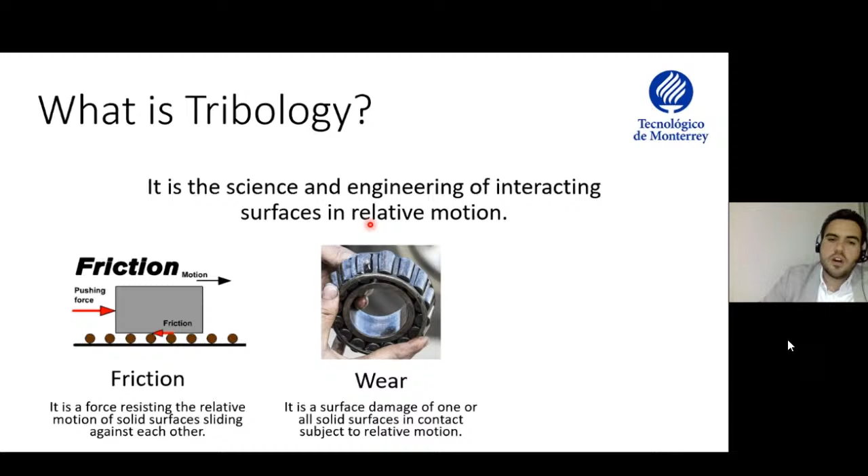The most important thing to know about tribology is that any pair of materials producing friction or exhibiting wear, and having a lubrication or requiring a lubricant to diminish both friction and wear, can be considered as a tribology topic for understanding.

Considering this concept about tribology, we can define what is a tribological component. This is very important because usually we know mostly mechanical components, but we cannot classify them according to their special function. So tribological components have the special function to operate producing friction or exhibiting wear over the long term of operation. So how can I define a tribological component?

This is the definition for a tribological component: it can be any mechanical element, lubricated or unlubricated, acting in relative motion in a mechanism or in a machine, producing friction and wear through its operation.

Maybe these kinds of mechanical elements are very useful, very common in machines, but most of them have to be improved and have to have certain characteristics to exhibit high performance, especially for electric vehicles. So most of these kinds of components are involved in the new infrastructure of electric vehicles.

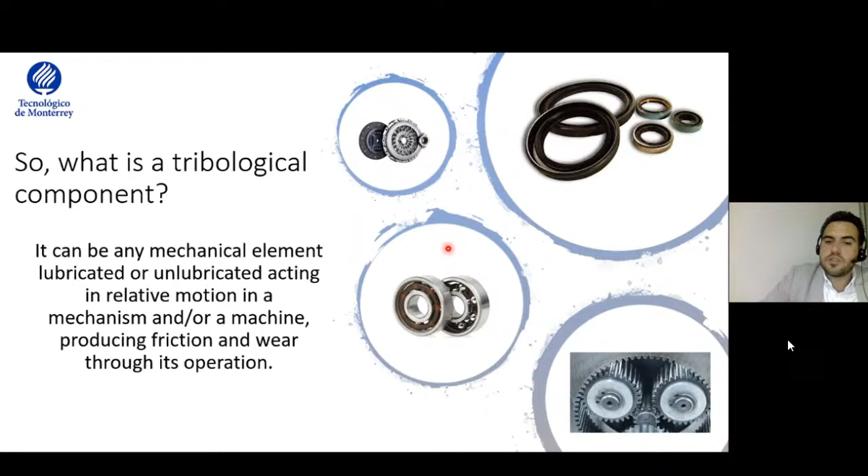To start the comparison, or the introduction for this kind of technology, I would like to start with the current technology in internal combustion engine vehicles. For example, in this picture that I am showing you, we have hundreds of mechanical components interacting together to produce the different tasks and functions inside the vehicle.

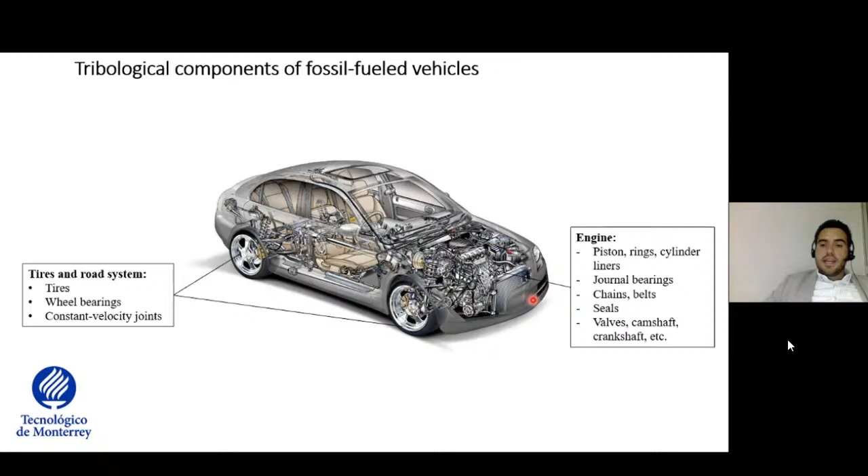For example, we have special components which are tribological components, and they are divided into the following: the tires and road system, which is the most important — if we don't have tires, we never move the vehicle on the roads. So this is the most important tribological component. The other is, there are different mechanical elements comprised in the engine.

Another category is the tribological elements comprised in the transmission and the brakes. Some elements in the suspension system, some elements in the steering, as well as in the differential system. Some miscellaneous, for example belts, pumps, oil, water and fuel pumps, the alternator, the compressor, etc.

And we will have another kind of tribological components named accessories, which involves the wiper blades, the seat belts, air conditioning system, etc.

So the most important thing here is to realize how many components are involved in internal combustion engine vehicles. So all of them produce a certain amount of friction, which produces the energy consumption of the vehicle.

So the challenge for tribologists or for mechanical engineers is to reduce as much as possible the friction caused by the operation of most of these components, with the exception of some components required to exhibit high friction levels.

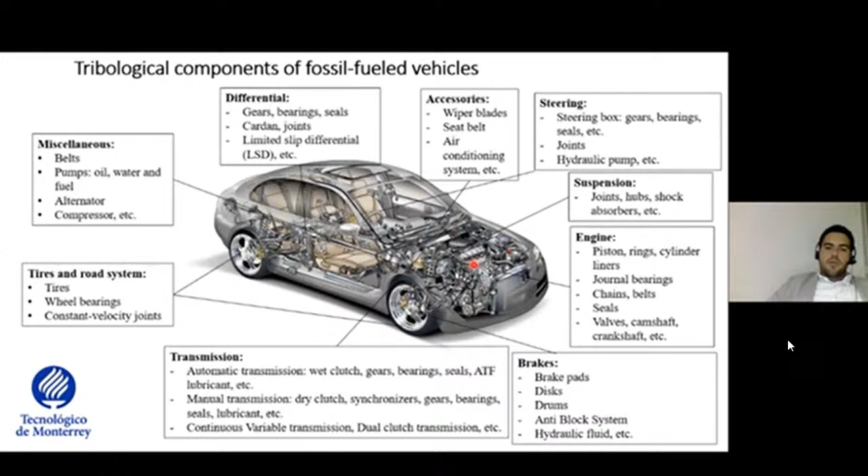So another component that will require high friction levels are the brakes, for example. If we have low friction in brakes, maybe we cannot stop the car quickly, or maybe there will be vibrations or noises due to the lack of control of friction.

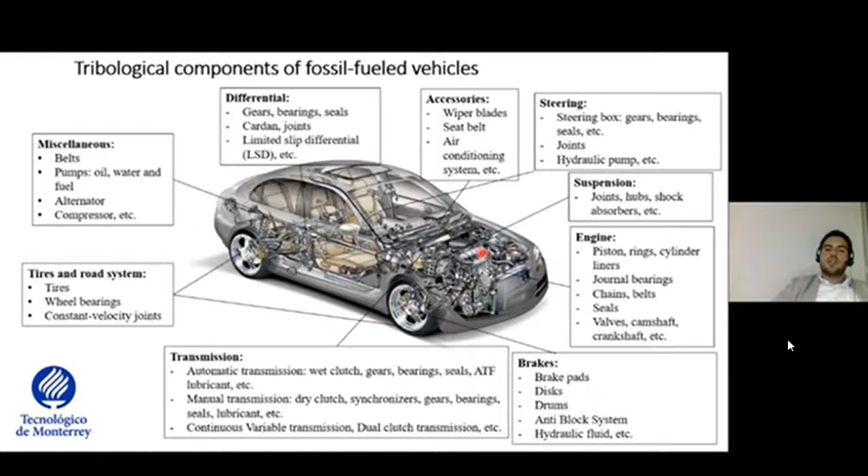So there are many components producing friction energy consumption by friction losses in internal combustion engines, and these losses can be distributed in the following way. For example, if we consider 100% of fuel energy supply to a vehicle, we will have different energy losses.

For example, the most common or known losses in an internal combustion engine are the losses caused by exhaust gases or emissions in the engine. Another is the cooling of the engine, and only 38% of the total energy supply to an internal combustion engine vehicle will be dissipated or used to provide mechanical power to the vehicle. So these are the most important losses, but they are related to heat losses.

So in order to find the friction losses, we need to study more about the mechanical power. For example, in this case, we have two types of losses in the mechanical power.

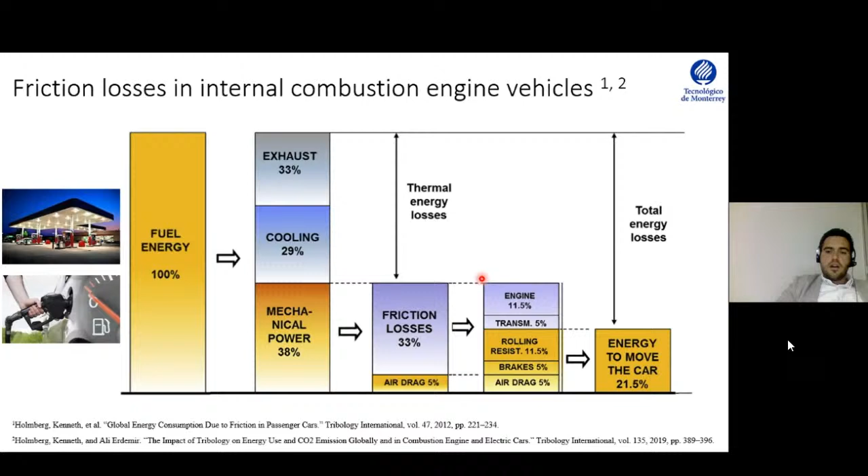This is the labor of tribologists. So in the case of electric vehicles, we will have a different distribution of energy losses. For example, the first thing to consider is the energy supply. In the case of internal combustion engine vehicles, we will use fossil fuels or maybe some biofuels, right?

But in the case of electric vehicles, the main source of energy will be the electricity produced by a grid. This electricity is produced from different sources, ecological sources, or maybe from thermoelectric plants. It depends on the infrastructure of each country.

So when we supply the energy to an electric vehicle which is powered by a battery, this distribution of energy is based on a battery electric vehicle. So the total energy supplied to a battery will be spent in different ways. The first one is that we will have some losses in the charging and discharging of the electricity from the grid to the battery and vice versa.

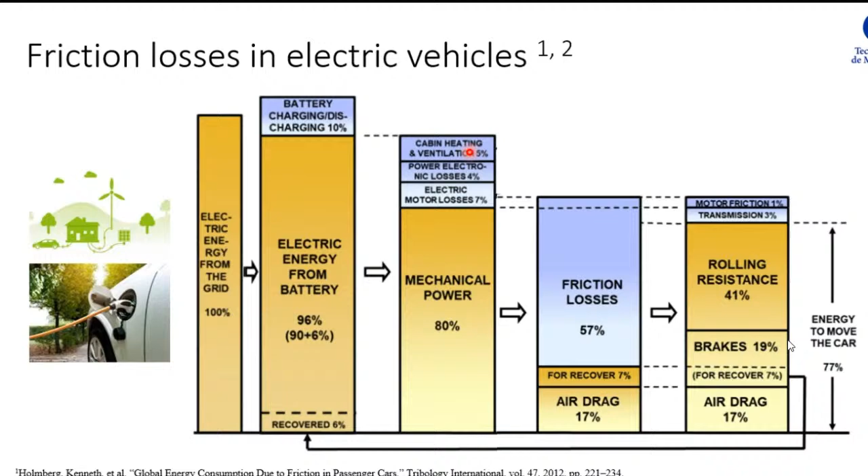So what are the main components, or what is the technology producing the friction losses? There are many components that we will see in another slide, but before this slide, I would like to ask this question: why consider tribology as a key route for automotive improvement, especially for electric vehicles? Well, tribology offers a reduction of fuel and energy consumption in general. Even the smallest reduction in friction could represent a significant energy saving in an electric vehicle.

So considering that electric vehicles tend to be autonomous in a near or short-term future, the autonomy of the vehicle will be led by the durability of the battery in terms of energy, right? So if we can reduce the consumption of energy by reducing the friction generated, we can improve the duration of the battery to get more distance run by the vehicles.

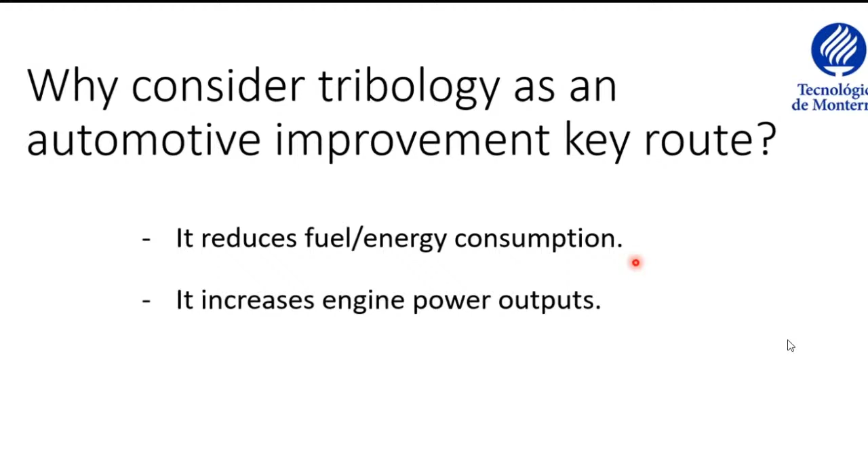So this is the most important thing. Another is that if we reduce the friction, we can increase the engine power output, so we can take more advantage of the electric motor, or the power of the vehicle. Another is the improvement of durability of all the components exhibiting wear in its operation, and the reduction of vehicle maintenance in general, right?

And finally, in electric vehicles, it is very important to consider that we need to reduce extremely the vibrations and noises, because we won't have any more internal combustion engines causing high levels of vibration and high levels of noise by the exhaust. In electric vehicles, there are no noises when they are operating.

The only noises occurring in electric vehicles are the noises produced by the electric current through the entire vehicle, and all the noises produced by some malfunctions of other components. So the reduction of friction or the control of friction could help us to maintain low levels of noises and vibrations in our electric vehicles.

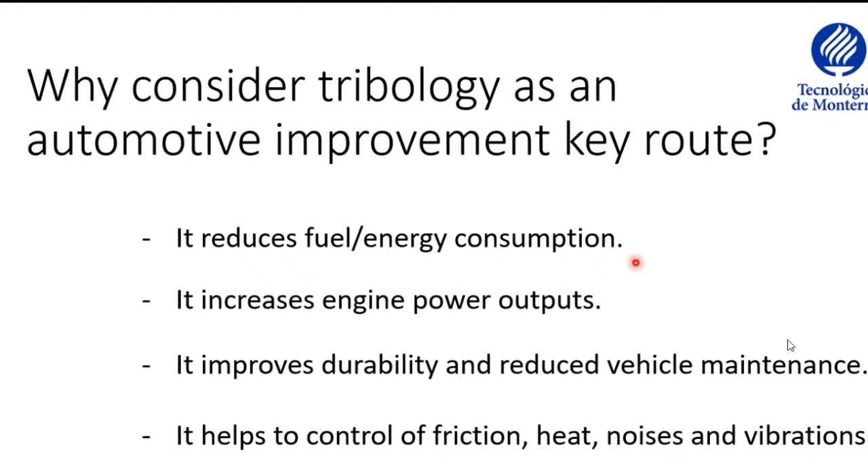So in the case of the technology, producing these kind of critical friction levels can be divided in different parts or different categories. The first one is the main source of power to the vehicle, that is the electric motor. Another is the transmission.

Usually, it is very common finding powertrains of electric vehicles comprising an electric motor attached to a transmission. It is because the transmission system or the gearbox helps to reduce the speed of the electric motor, but it improves the torque required in the electric vehicle. So it is the most often architecture found in electric vehicles.

Another thing producing friction are the wheel bearings. These are unavoidable elements in any vehicle as well, so the friction produced there is very critical in the vehicle. Another is all the mechanical components involved in the steering system, the tires, obviously, and the ball joints, and the constant velocity joints. These joints are also unavoidable because they allow us to use the suspension system. Mechanically, they are also very important components, but they produce high levels of friction.

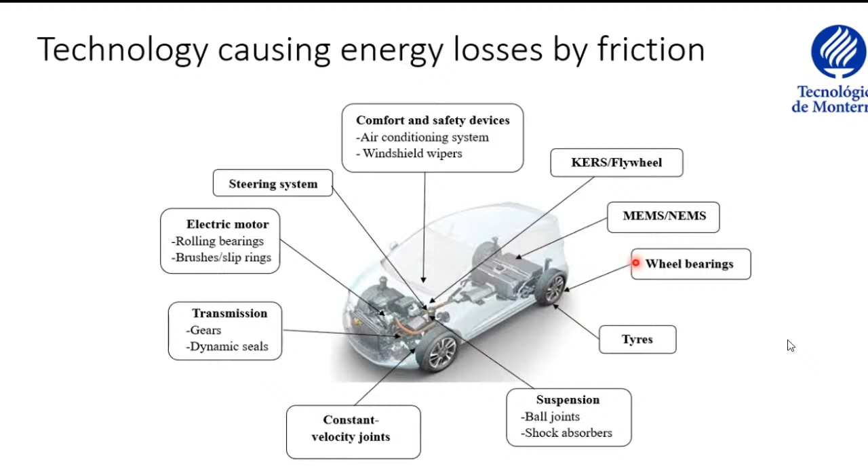And finally, we will have many, I don't remember the number, but around 20 or 50 MEMS or NEMS used for sensing the different operation of the vehicle. So these are the most critical technologies, and I will talk about each of these categories. Starting with the electric motor, we have different electric motors which can be considered for electric vehicles. The most important is the synchronous permanent magnet motor.

Actually, it is the most used in sport cars or in passenger cars, and the other four are also an option, but they are not as popular as the synchronous permanent magnet motor. They are rated according to their electric efficiency, and as you can see, the most efficient is the brushless, right? The synchronous brushless motor.

So, what is the constant mechanical element or tribological element producing friction losses in all these types of electric motors? The main is the rolling bearings, or bearings. This is the most common element producing friction losses, and in the case of brushed motors, we will have this element that is one of the causes that this motor is not suitable for electric vehicles.

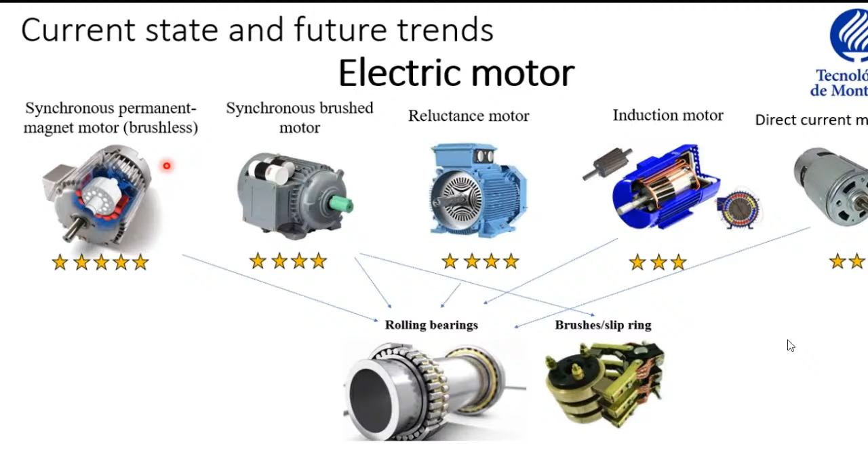It is because the brushes and slip ring contact produces high levels of friction and electro friction due to the sliding contact produced in this component. So the efficiency of this motor is lower than this one, because this one doesn't use a brush and slip ring contact.

Okay, so what is the trend to reduce the friction produced in these elements, in particular the rolling bearings? Well, we need to conduct research on grease technology, different coatings for the balls or the rollers in the bearings, and new designs in rolling bearings. If we can improve some of these points, or even the three points, we can reduce in significant amounts the friction produced in these kinds of motors, right?

In the case of brushes and slip ring, there are some works attempting to reduce the friction produced by the electro-tribo contact, and there are some pairs of materials meeting this purpose: graphite and graphite, coin silver, brass fiber.

But there is a very huge challenge in tribology for this component. That is getting a better understanding of the electric tribo contact produced in this brushes slip ring contact, right?

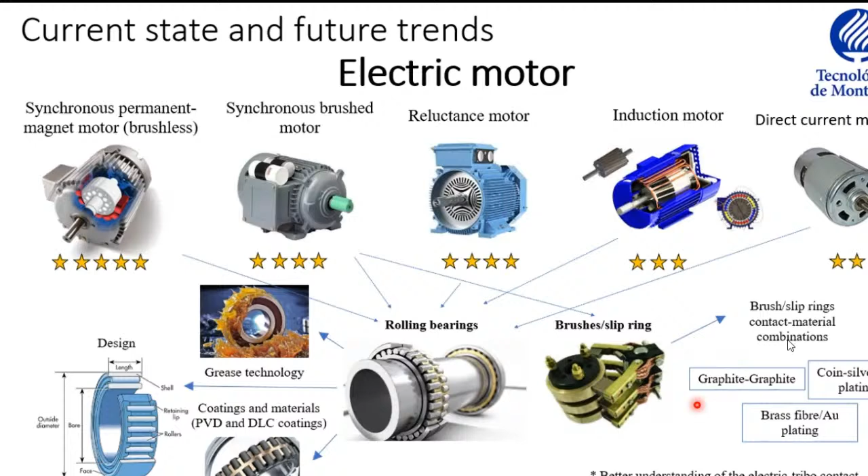So in the case of grease technology, we will need to understand what is the composition of a common grease. A common bearing grease is made mainly of 70 to 95% of a base oil, which is commonly made by using mineral or synthetic oils. 3 to 30% of the grease is made by a thickener. This thickener can be made of simple metal soaps or complex metal soaps, or maybe some non-soap thickeners, and the rest is made of additives, different kinds of additives.

Each additive gives certain physicochemical properties to the grease. It is very important. We can use these 2 points as a constant, but the addition of additives will define the specific properties that the grease will have. So we have an evolution of the production of greases for electric motors or for rolling bearings.

The first greases used by humanity are the animal fats. This is well known to everyone. The animal fats were used by Egyptians and Romans. This is the first report of using a grease for helping to transport heavy loads. And then with time, different compositions of different greases have been produced.

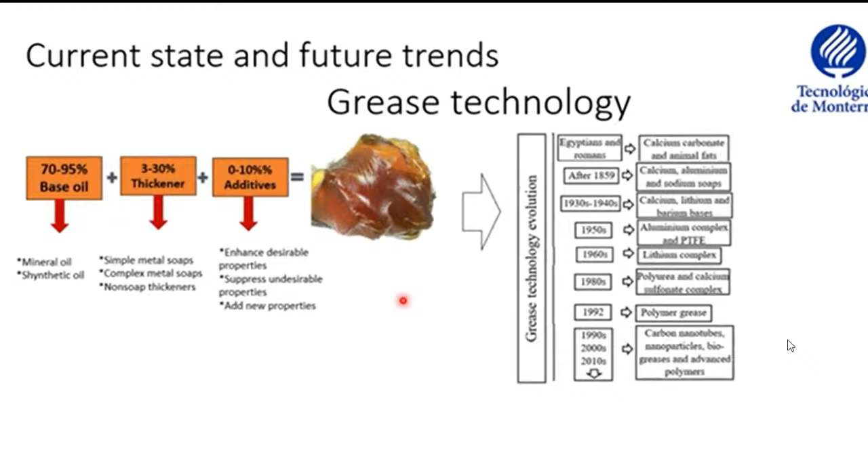Currently, the research on this lubricant is based on the use of carbon nanotubes, some kinds of nanoparticles, discarding the use of mineral oils or fossil oils by using bio oils or bio greases, and using some high performance thickeners through the implementation of advanced polymers. So this is our trend, and in electric motors we can implement some enhanced or high performance greases being developed these days.

So the current progress is the development of greases made of synthetic oils and vegetable oils to meet the new eco-friendly demands in the world, using thickeners made of rubber, polypropylene, and methylpentene, and using a wide range of new additives produced in the world.

So in the specific case of electric motors, there is a current challenge that is specifically based on the improvement of a property called tackiness. Tackiness is a grease property that allows the sticking and formation of long threads between two separating surfaces, mainly in gears or in the rollers of rolling bearings. while the grease redistributes itself between the surfaces.

So this property can be said to be the most important requirement for greases used in EVs, or electric vehicles. So finally, we cannot discard the use of bio oils or bio greases for producing electric vehicle greases.

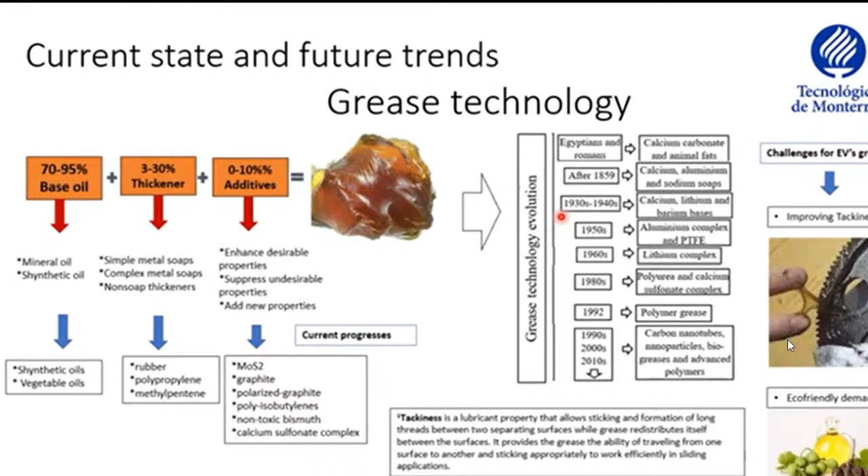Okay, so in the case of transmission, we will find these common configurations and architectures. One of the most popular is the in-wheel motor system, in which electric motors are attached directly to the front wheels, and these wheels are moved independently by each electric motor. This is the most efficient because there is not a gearbox attached to the electric motors, but this system has some deficiencies.

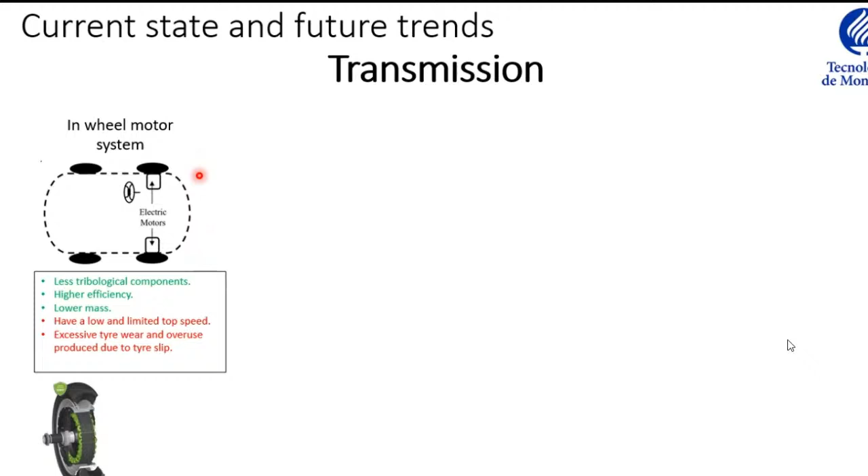For example, they have a low and limited top speed because the electric motor is directly connected to the wheels, and excessive tire wear produced due to tire slip. As you can see, the electric motors are attached to the front wheels, but when the electric vehicle takes a curve or turns left or right, each electric motor must control the speed independently for each wheel. So in this process, the tire produces a slippage with the road, so the wear caused to the tire is very high. This is the most important deficiency.

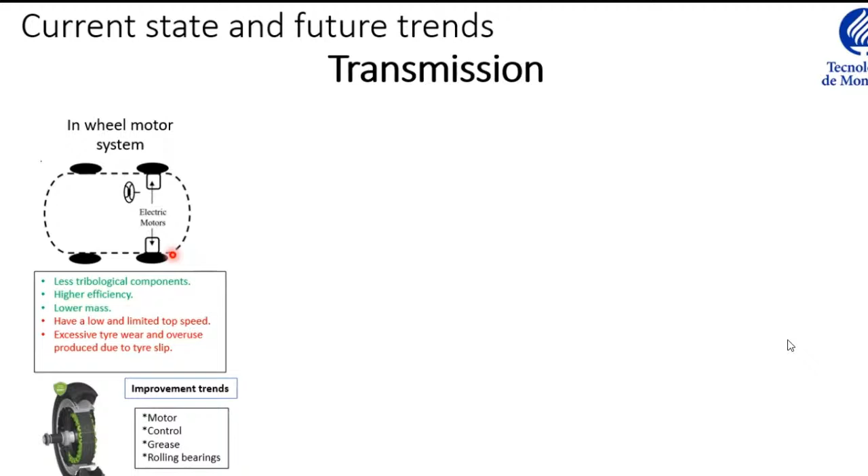What are the improvement trends? The first one is using efficient electric motors in this configuration. Improve the control of the electric motors in this kind of configuration. Producing an efficient grease and using rolling bearings with very low friction. The second kind of architecture is an electric motor attached to a fixed gear, and this fixed gear is attached to a differential in the front wheels.

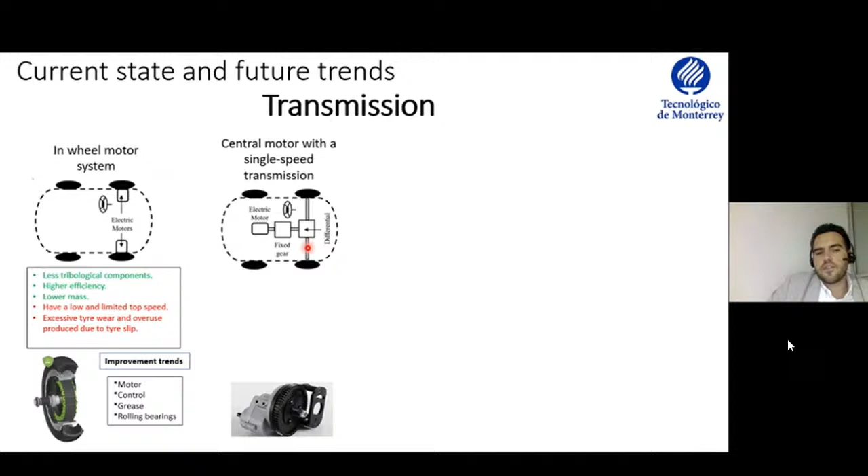It can be also to the rear axle, but in this kind of configuration, it can be used also in the front axle. So what is the problem here? The problem here is that we have a fixed gear or a gearbox that produces high levels of friction. So this is the main problem, because there are more moving parts. But this configuration helps us to increase the vehicle driving range and top speed, having a satisfied dynamic performance and easier speed control, right?

And finally, we have a central motor with a multi-speed transmission. This configuration is not so popular. Actually, it is a current research trend for electric vehicles, using an electric motor attached to a clutch or to a wet clutch, and this clutch is attached to a gearbox. This is because this gearbox can be used according to two different speeds, or we can use a multi-speed transmission, for example, a CVT or an automatic transmission.

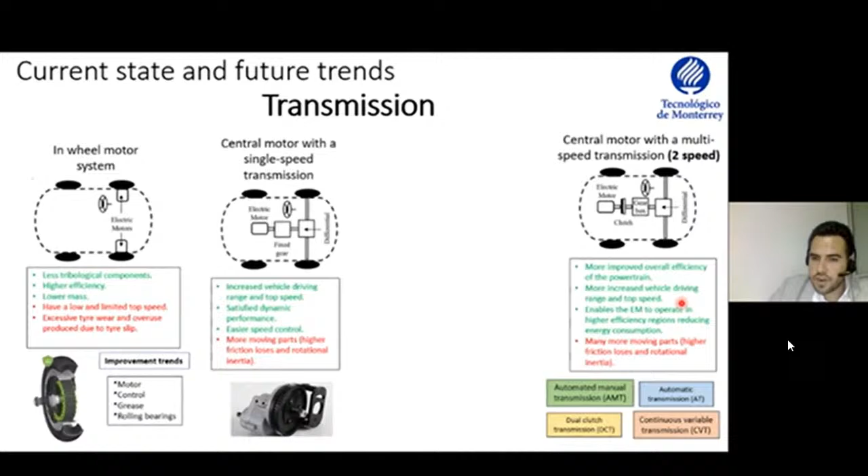I don't know. The point here is that we need to have a gearbox that can be switched for two speeds. And the problem here is that we have many more moving parts because this gearbox will have many more gears and many more synchronizers or another element inside. But it exhibits some significant advantages. For example, more improved overall efficiency for the powertrain, more increased vehicle driving range and top speed, and it enables the electric motor to operate in higher efficiency regions, reducing energy consumption.

As I mentioned before, this configuration is still in research for different companies. But it can be important to consider for future investigations or future developments. So, what are the improvement trends? In the case of gears, in these two configurations, we can modify the gears inside the gearbox by using low friction coatings or some kind of texturing in the gears. In the case of dynamic seals, because all these elements will have dynamic seals, it is by using low friction materials as well, surface texturing, and improved polymer lubricating oil compatibility.

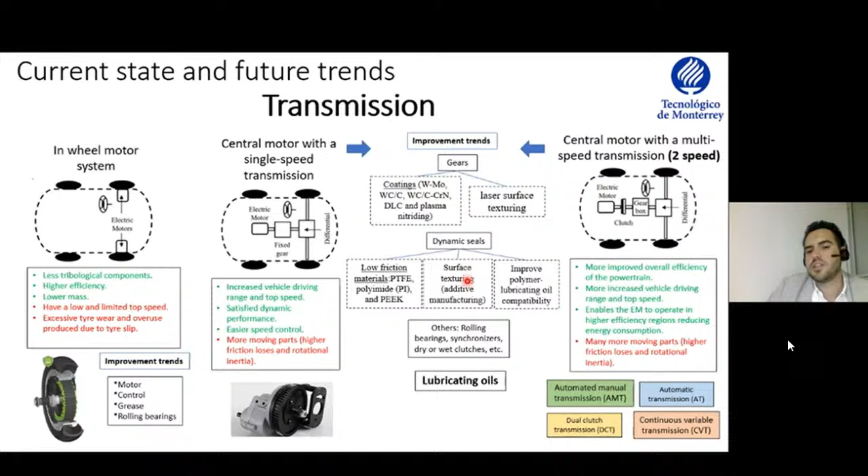This is more like a wear problem, right? Caused by the lubricant incompatibility with the polymers either in the electric motor or in the gearbox. And finally, choosing the appropriate lubricating oil is really a challenge in this technology. Lubricating oils are expected to change in the coming years, especially for electric vehicles propelled by electric motors attached to a certain transmission, right? Because the electric motors are inside the transmission system or the gearbox, and the whole system is lubricated by using the same oil.

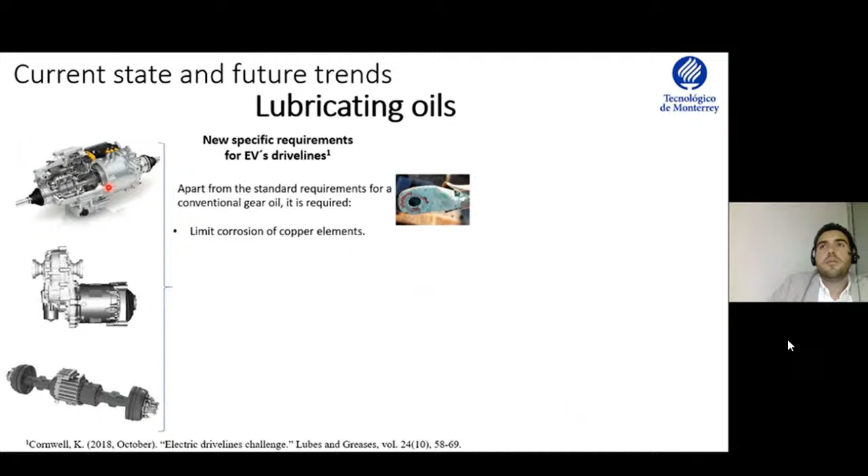So there are some problems. For example, the electrification of the entire shaft can cause some bearing currents, or some gear currents or leakage currents from the electric motor to the shaft, producing premature wear in all the mechanical elements that you can see inside the powertrain. So these lubricating oils must meet new standards or new demands for specifically these kinds of powertrains.

For example, the resistance to corrosion should be improved, especially for copper elements, because we will have the lubrication of the entire wire of the electric motor, and also we will have different alloys and metals in the entire powertrain. So if the lubricating oil is not resistant to corrosion, or does not isolate the corrosion in the system, all the elements there will be corroded and will fail in a very short time. The other thing is to improve the compatibility with polymers, especially with resins used in the wires of the electric motor.

Most lubricating oils existing today, especially for gearboxes, have some acidic components in their composition, so they can damage the polymers. For example, resins or certain O-rings or certain seals used in the powertrain. So if the lubricating oil does not meet this compatibility, any electrical device will fail just by the contact with the oil.

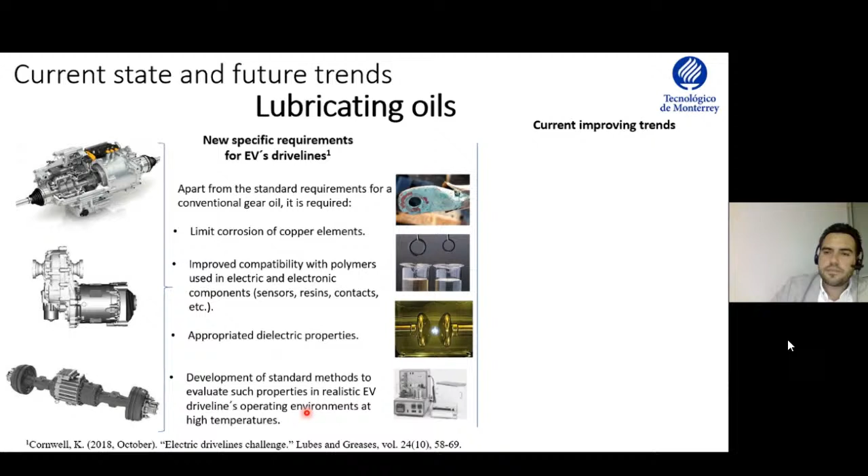And another trend is the use of more improved synthetic based oils. This is the challenge, because these synthetic based oils are very often used in high demanding applications, but they have not been tested for being used in electric powertrains. Another is not to discard the eco-friendly demands. So we can blend or formulate new electric vehicle lubricants by using certain amounts of vegetable oils.

It is well known that vegetable oils exhibit better lubricity than even synthetic oils, but the problem with this kind of oils is the low resistance to oxidation. So the problem with lubricants based on vegetable oils is the durability. But we can improve the durability or the resistance to oxidation by adding certain additives. So the formulation considering both synthetic oils and eco-friendly oils is also a challenge, right?

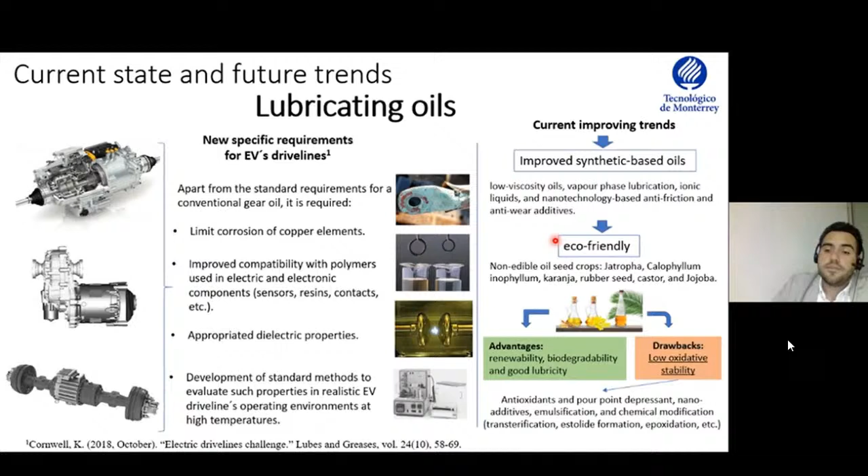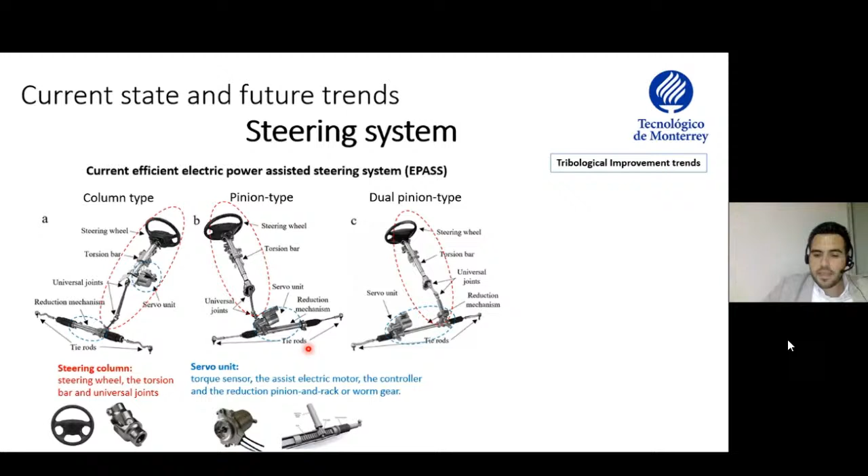So in this case, we have a steering column that has a steering wheel, the torsion bar, and universal joints producing friction losses. We also have the servo unit, which comprises the electric motor, the torque sensor, and the pinion and rack or worm gear that is in charge of producing the movement of the wheels mechanically. And finally, we will have the tie rods, the pieces used to connect the rack and pinion gear with the wheels. Okay, so these three systems are high consumers of energy from the battery.

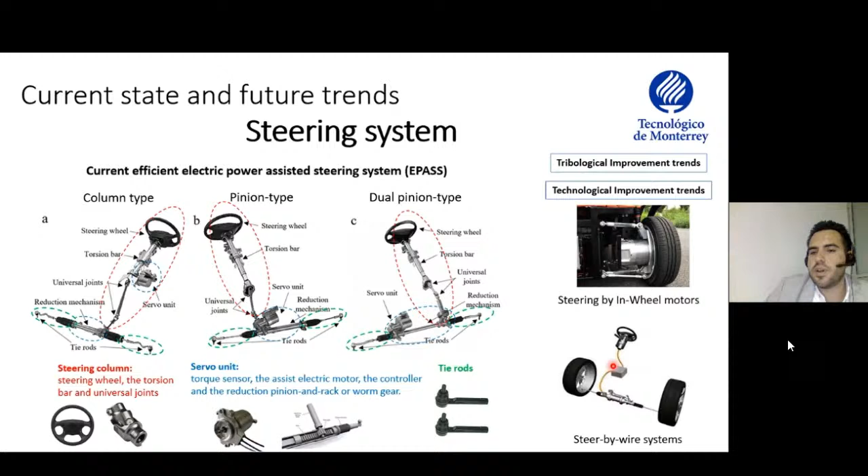So we have some technological improvements to reduce or eliminate these mechanical elements, and the most attractive is again the in-wheel motor system. In this system, we totally discard these components by only using a motor, controlling the speed for turning to the right or turning to the left. And another system is the steer-by-wire system, in which the steering column is eliminated, and we only have the pinion and rack gear actuated by an electric motor, and that's it.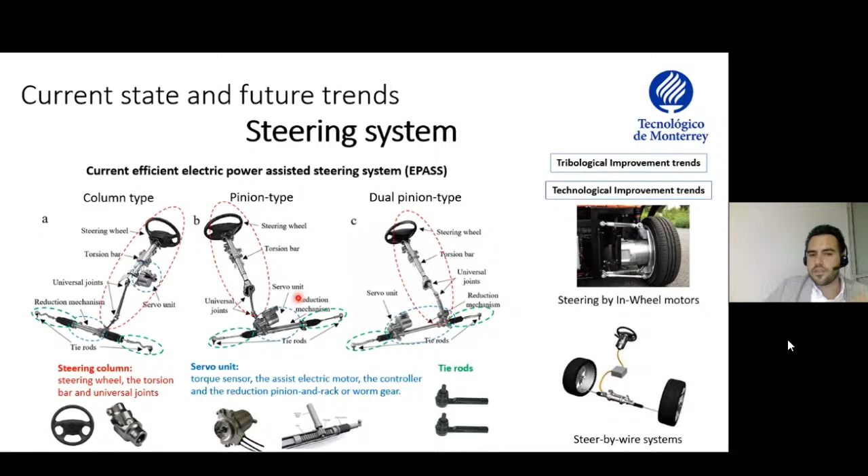Okay, the motion of this pinion and rack to move the wheels is produced by a signal sent by a computer in the wheel. It is not totally safe or totally confident for the user, because we always need to feel the mechanical contact with the wheels just to provide security to the user. If we don't have this contact, it will not be safe for the user. Currently there are some rules which prevent the use of this system because it has not improved as required for exhibiting high levels of security.

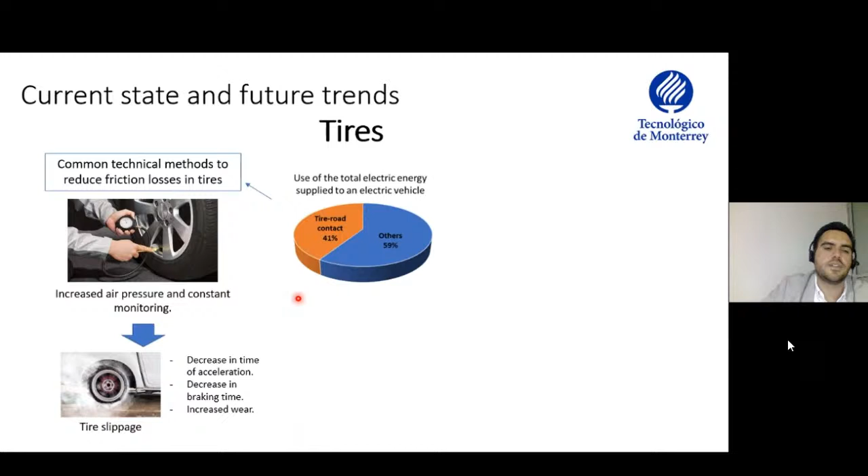And the other component is the tires. We have different ways to reduce the friction in tires. The most common and the cheapest method is increasing the air pressure of the wheels and constantly monitoring this pressure. But usually this technique produces tire slippage. It decreases acceleration time, it decreases braking time, and it produces increased wear of the tire. So we have other options.

The first one is the new tire design. This is in order to reduce the friction consumption by the wheel and to reduce the weight of the wheel, right? Also, if we can reduce the weight of the entire vehicle, we can reduce the consumption. So these new trends in tire design are getting more attention, especially for electric vehicles.

The other one is the use of new materials for the rubber of the tire, but although they have exhibited very significant results in terms of friction and weight, the production of these new materials has certain drawbacks for commercialization. The first one is the high cost. Another is the unreliable production techniques and uncertainty over environment, health, and safety risks, right? Because some materials are dangerous for humans.

And the other one is to control the operating parameters. For example, controlling the air pressure of the tire, the driving speed, and the tire air composition. We can use a different gas inside the tire, different from conventional or environmental air, right?

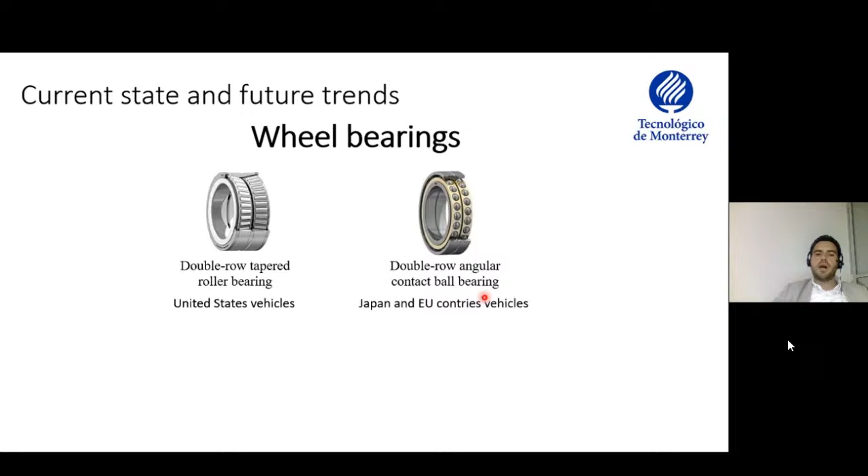For example, in the United States, the vehicles produced there use these wheel bearings, and in Japan and European countries, they use these kind of bearings.

So what are the common components of these bearings causing friction? One is the polymer seal that avoids the leakage or spreading out of the grease. Another is the grease, obviously, and the final is the rolling bearings used in the bearing.

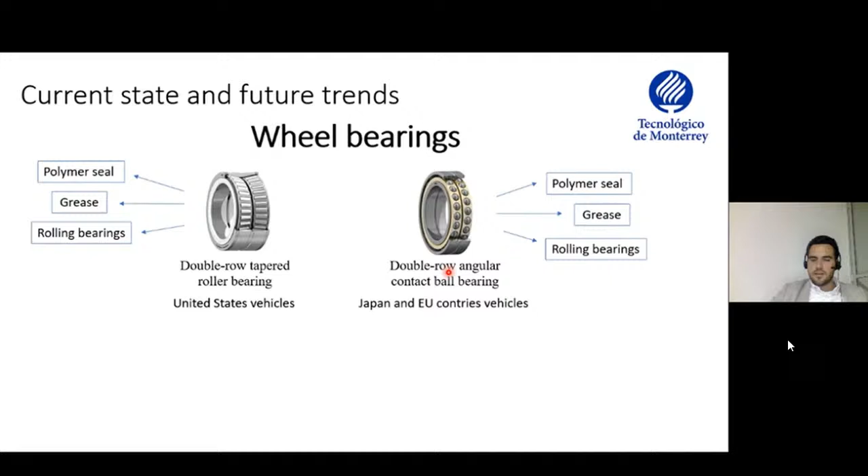So what are the improvement and development trends? One is new designs by reducing weight, improving the maintenance periods, improving the sealing capacity of the seal, and improving the grease. With new design, we can reduce the size of the bearing, and if we reduce the size of the rollers, we can reduce friction and reduce weight.

Also, we can use some interesting coatings which are currently developed. The most important or most remarkable is the DLC coating, that is diamond-like carbon coating. It is the coating exhibiting the lowest friction levels in any kind of application.

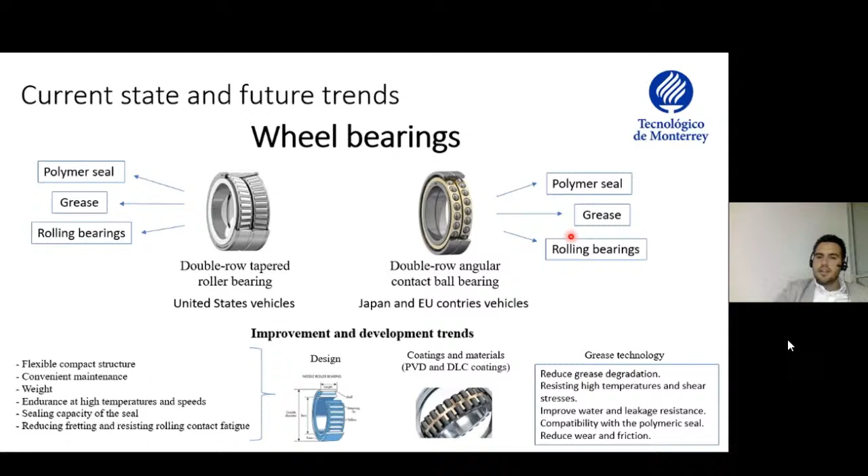So in the case of grease technology, we need to take into consideration the developments presented in the previous slide. And in the case of constant velocity joints, maybe we cannot imagine what a constant velocity joint is, because it is a very important mechanical component. So this is a mechanical constant velocity joint.

This component here is the constant velocity joint, and it operates by using a kind of roller bearing. It uses a grease and it uses a boot. The boot is a seal in order to avoid that the grease spreads out from the bearing.

What is the problem here? The main problem of this component is the rupture or failure of the boot. With time, we will never realize that our boot, or the boot of the constant velocity joint, has failed. So the problem here is that the grease spreads out from the bearing, and with long-term use, the bearing fails, causing a lot of friction losses.

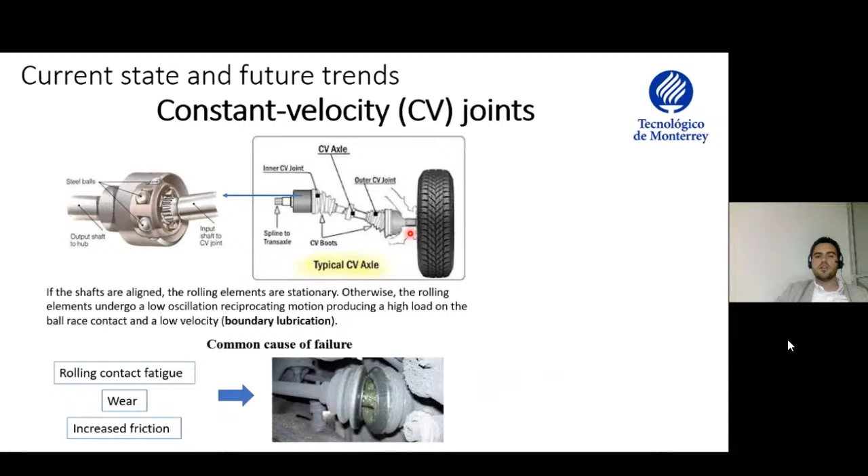So it is a critical component even in internal combustion engines, but this component will also be used in electric vehicles. So we need to take care about the performance of this component. The most important thing to consider for improvement is the grease technology, but also the compatibility with the rolling bearings and the compatibility with the boot. If we improve these 3 points, we can improve the performance of this component.

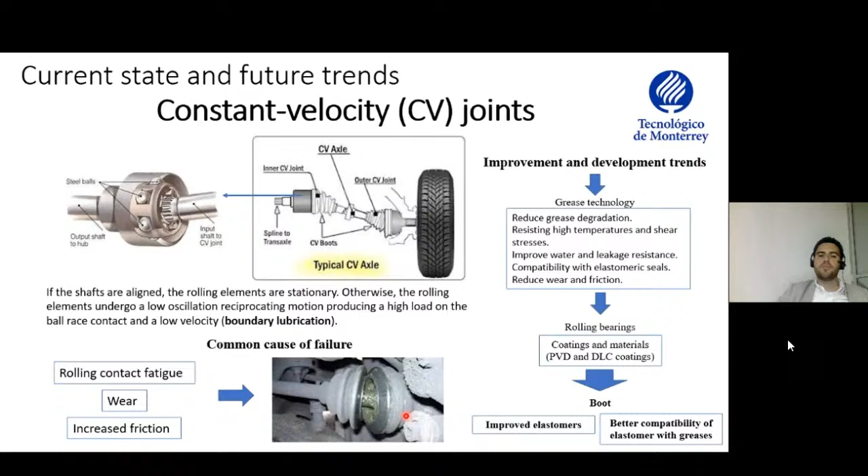Another important technology and current trend in research is the kinetic energy recovery system, especially flywheels. This is a technology used to recover as much as possible the energy dissipated by stopping the car when it is running.

Everyone knows that the electric motor used in electric vehicles can be used also as a generator. So when we use the electric motor as a generator of electricity, we can recover electricity, but not totally efficiently. So we need to use a mechanical technology that helps us recover more energy from the stopping step.

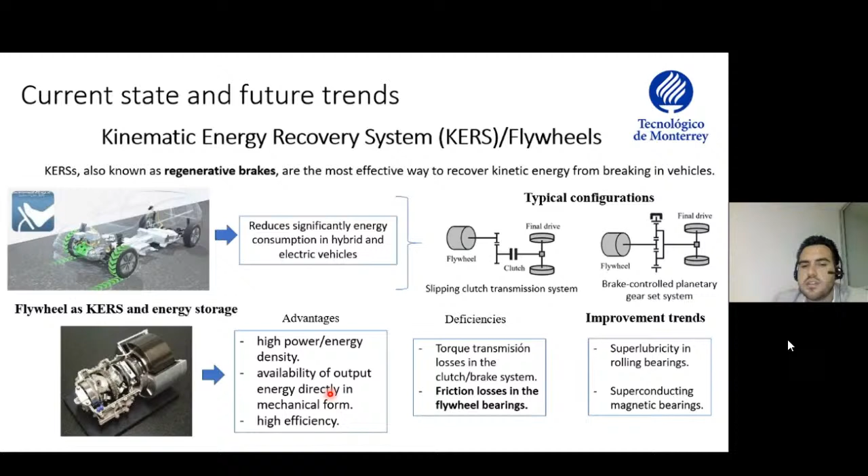But in the future it can be implemented in these kinds of systems for improving electric vehicles. In the case of comfort and safety devices, we have an unavoidable system that provides us comfort, especially in countries with extreme weather: the air conditioning system. This perhaps can be considered an unimportant component producing friction losses. However, it is one of the main sources of energy consumption in an electric vehicle, used for example in winter or in summer when the weather is extreme.

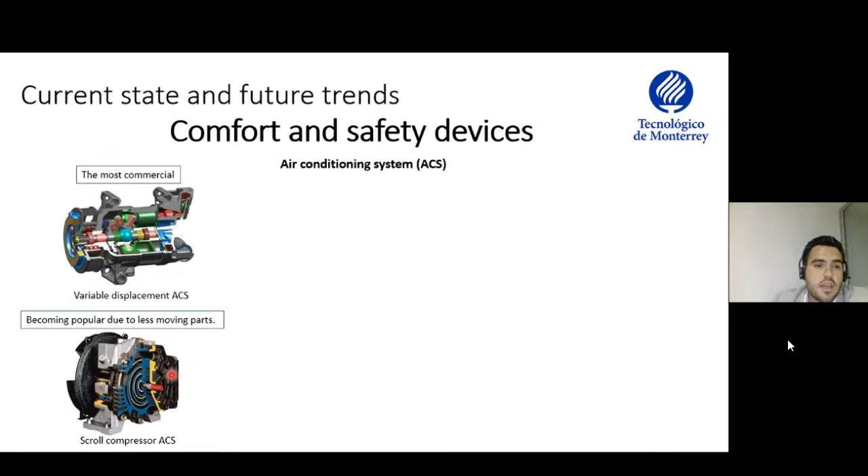So there are different configurations of these mechanical systems, but there are some improvement trends. The most important trends for reducing friction in these components are the use of sliding elements made of different materials causing very low friction, for example polymers, or again DLC, diamond-like carbon.

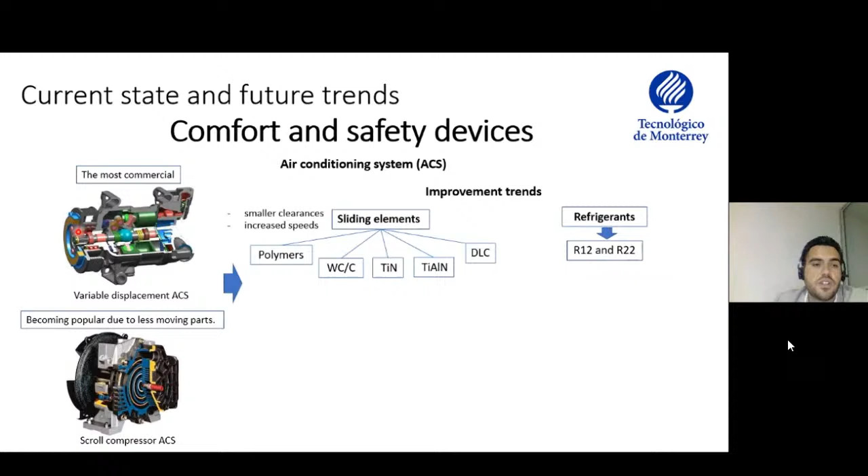Another trend is the use of refrigerants exhibiting low friction coefficients during the air conditioning process, for example the use of CO2 or carbon dioxide. This is for two reasons: first, it exhibits lower friction coefficients in the system, and second, the eco-friendly demands or lowest damage caused to the environment by using this refrigerant. However, it is not a rule - it is not accepted in any country yet to be used as a refrigerant, but the trend is to investigate more about this.

In the case of lubricants, the main ones used are synthetic polyolester and polyalkylene glycol. These lubricants are used together with the refrigerants inside the air conditioning system, and both fluids lubricate together. As a note, if we reduce the friction in this component, we can reduce energy consumption in the battery of electric vehicles. So it can be a very critical mechanical element considered for the improvement of electric vehicles.

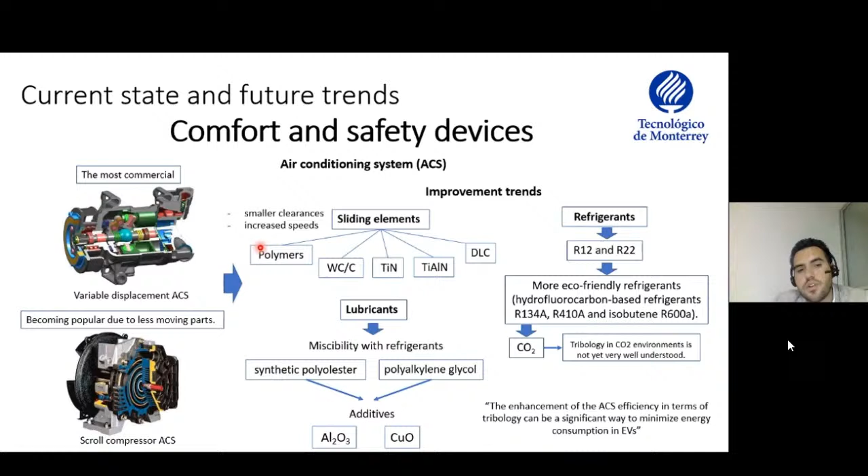So in the case of suspension, I will focus on shock absorbers. This is because in electric vehicles it will become a real problem, particularly in terms of comfort of the vehicle. We have different kinds of shock absorbers - they can be active, passive, or semi-active, and they can have architectures like twin tube or monotube, the most common in vehicles.

What is the purpose of this shock absorber? This stud can be moved up or down when the vehicle moves, or when the tires are rolling, and there is an oil seal. All these parts are lubricated using an oil, but when this stud moves this way, friction is produced in this part. This seal avoids leakage of the lubricant contained in this part to the exterior - it is a dynamic seal that promotes the movement of this bar but avoids the leakage of the fluid.

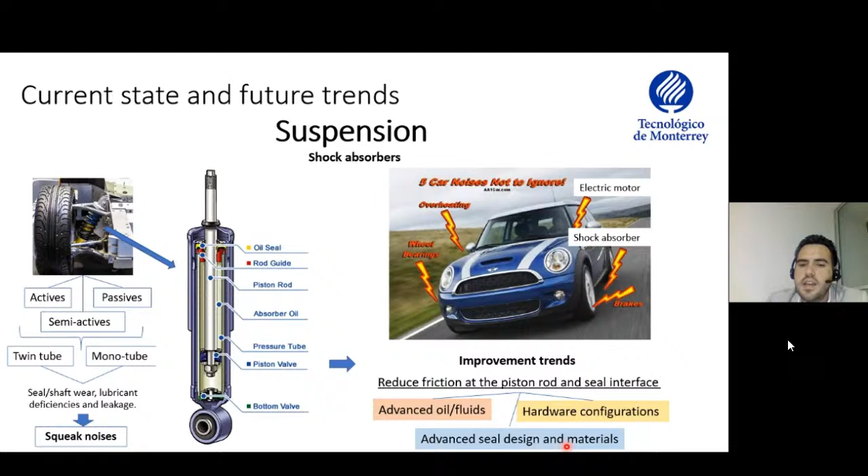So we can use novel or advanced oil fluids. We need to use or develop new hardware configurations for these kinds of components, and advanced seal design and materials. Finally, electric vehicles have different microelectromechanical systems, also named MEMS, or NEMS in the case of Nano.

These systems are involved in the sensors in electric vehicles. For example, we have inertial MEMS. There are some examples of sensors based on inertial MEMS: pressure flow MEMS, infrared optic MEMS, and radio frequency MEMS. So in this case, we have a hybrid vehicle.

But most of these MEMS are used in electric vehicles. Now, if we consider the use of other technology to make our electric vehicles autonomous, we will use more and more micro electromechanical systems.

So the problems with these microsystems are the high levels of stiction because of the size of these sensors, high dynamic friction also due to the size of the sensors, and wear. When some of these points fail in the sensor, it is a total fail in the sensor.

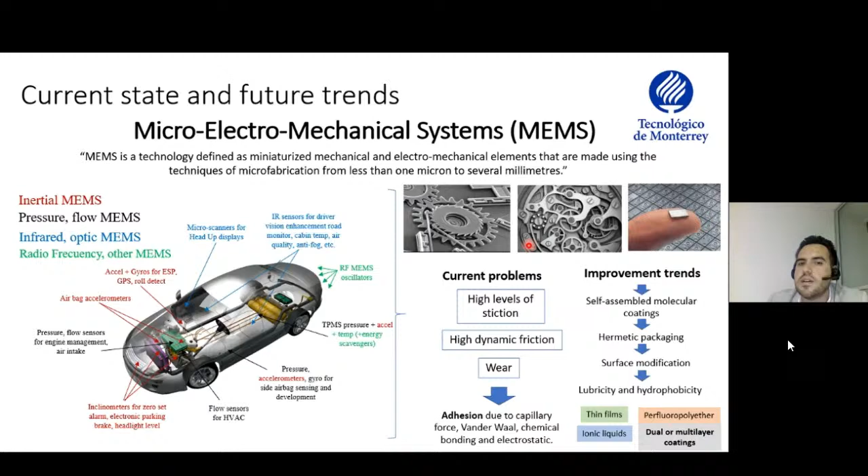So this is all my presentation. I think I took more time than I was allotted. I want to invite you, if you want to know more about this kind of tribological components in electric vehicles and the trends, you can get access.

Actually, the paper is an open access source. You can read it if you have more questions, or read more about it. Thank you for the time, and thank you for the invitation for this presentation.

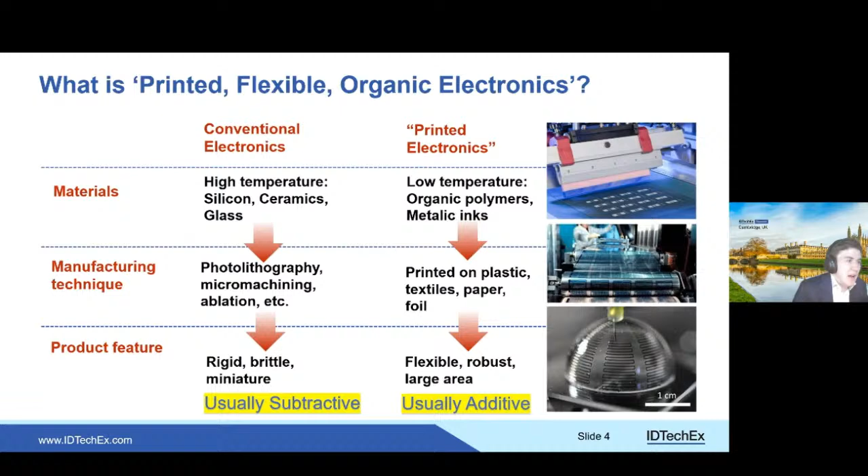People are very keen to talk about the flexibility and the compatibility with large area manufacturing, and perhaps a little bit less keen to talk about the fact that fundamentally printed and flexible electronics are lighter because you're not having to use a big rigid piece of FR4, and because it's conformal, you can wrap those electronics within a smaller package, which means that there's less other material used for the housing.

And particularly in a vehicle, where the range of an electric vehicle is important, or you want lightweight for handling, that reduction in weight, I think, is really important. So if we look at the kind of market drivers, again, there's a whole range of factors why people would want to transition from conventional electronics to printed electronics.

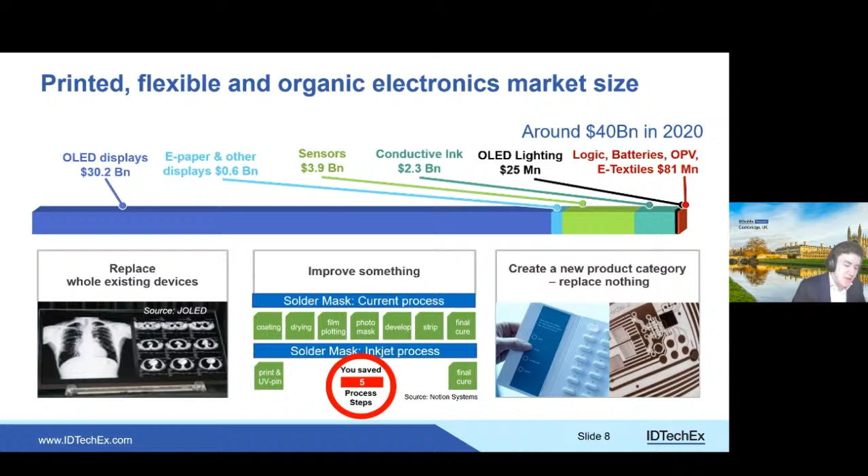Or you can create a whole new product category and replace nothing, basically. So some examples in a car might be putting displays on the outside of an autonomous vehicle to signal to pedestrians, or incorporating sensors throughout the seat for monitoring passenger well-being rather than just merely detecting occupancy as at present.

So if we move on to the next section of the talk, I'd like to look at the motivation for printed and flexible electronics in vehicles. And broadly speaking, we see there's three key transitions here, and the first two are pretty obvious. I'm sure we're all aware, particularly at this conference, about electric vehicles replacing internal combustion, and it seems like every few weeks another car manufacturer announces their timeline for going EV only. And I think the government regulation, certainly in the UK, says that any new car sold has to be an electric vehicle by 2030. So I think that's a trend that is certainly happening, and everyone's on board with.

The increasing levels of autonomy, so this move towards self-driving cars, I think it's going to take a little bit longer than the transition to EVs, but that's certainly happening as well. There's huge amounts of money going into autonomous driving. Arguably, there's some level 3 cars at the moment, with the one recently about to be released from Honda. And that will also lead to changes in the design of the car, because if you move towards level 5, you've got to think about how those cars interact with pedestrians, but you don't necessarily need to make such a driver-focused interior, because obviously the car will be doing the driving itself.

And the last transition here, I think, is a particularly important one that links very well to the idea of EVs, and that's the shift in differentiation from the powertrain to the interior. And if you go back 5-10 years before EVs were really a topic, the more prestige models of cars tended to have bigger engines, and manufacturers would talk about the technology in those engines as a way of differentiating that product.

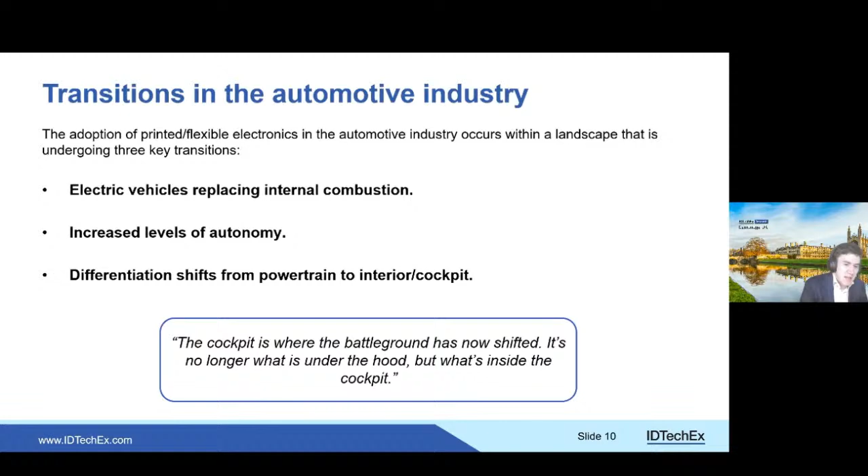And I think that's a really important idea when it comes to printed and flexible electronics, that we shouldn't just be thinking about how can we get these into the EV powertrain, but what does the transition to EV mean for the design of the vehicle as a whole, and hence what other opportunities is it opening up for printed and flexible electronics? What are manufacturers now going to be focusing on? So we look at some of these motivations.

One of them, as I've already mentioned, is this idea of SWaP-C. You're reducing the size, weight, power requirements and the price. And obviously all of those things are beneficial. So I've just outlined some of these here. With the size and weight, you kind of win on both the battery range and the handling. A lighter car takes less energy to accelerate, and will also handle better in the corners for a sportier experience that you can then sell to your customers. Or you can just put more batteries in and keep the same weight and increase your range.

And reductions in power, particularly for the sort of air conditioning systems, as we heard from the previous speaker, are another sort of challenge, particularly with electric vehicles where range is such a priority. There's another benefit that's not necessarily related, which is this move to cheaper manufacturing. This is facilitated by moving from sheet to sheet assembly towards roll to roll assembly. If you can imagine making sensors on a production line not dissimilar from one you might use to print newspapers, your costs can become an awful lot lower.

I'm going to talk about that a little bit more later on. But certainly there's a German manufacturer who's wanted to make battery sensors in this fashion. And you can produce these in such high volumes so quickly that your costs of the machines, in terms of depreciation, become almost negligible. Instead, your cost is basically dominated by the material.

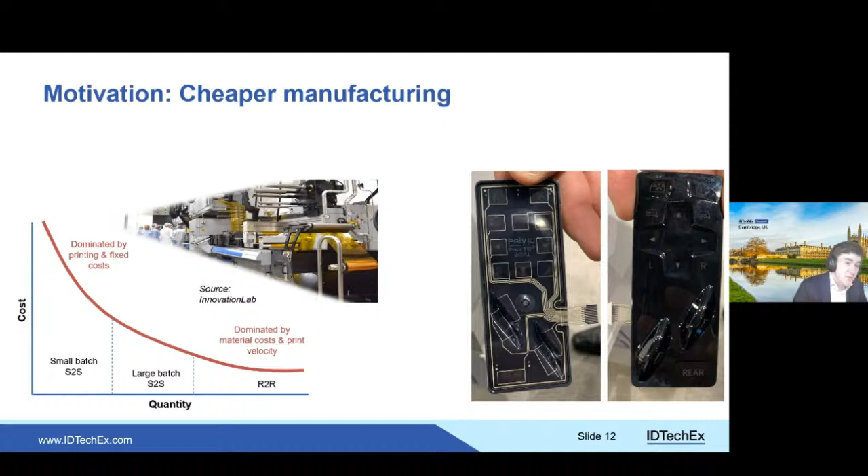There are other ways of making the manufacturing cheaper. One of those is in-mould electronics and film insert molding. Rather than having discrete buttons that take time to assemble and wire up, you can instead incorporate all of that functionality with capacitive touch switches, etc., into a piece of plastic, and then you just have a single part that is lighter and much cheaper to make. And we're already seeing that. If you look at some of Volkswagen's new electric vehicles, they've managed to reduce costs by incorporating a lot of capacitive touch switches rather than conventional mechanical buttons.

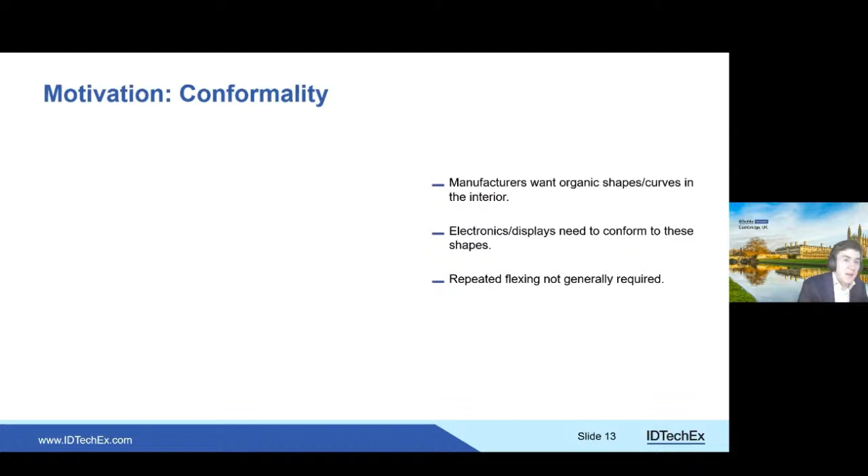So I seem to have missed the graphic here, but of course the other motivation is the conformality, that manufacturers want these organic shapes and curves in the interior. If you look at a car from 20, 30 years ago, it was very boxy in the 80s. Now the curves are very swoopy. You end up with much more of these organic type shapes inside. And of course, your electronics and displays need to conform to those. But we don't generally need any repeated flexing.

And certainly in the UK, we tend to have more of a problem with it being cold. And so people driving electric vehicles in winter can complain that their range is an awful lot less, 30% less in some cases than you might see in summer. And that would be, not only is the battery actually storing the energy less effectively, but also you've got the heated seats and the interior heaters on. And so in terms of controlling the battery and maximizing range, it's really important to control this temperature.

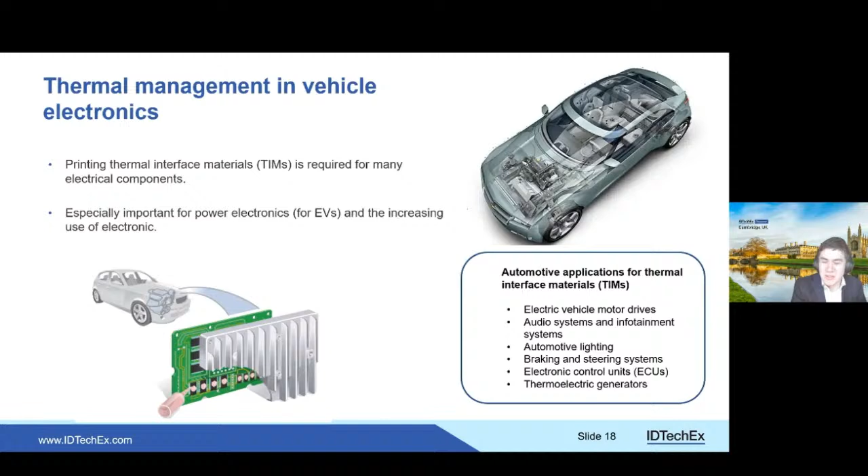So moving on to the interior, I think this is where the biggest opportunities are. And so I've split this up into four different sections. One is HMI technology, HMI standing for human machine interface, so basically anything that you can touch or that senses your presence or that you can interact with. Heaters for the interiors, new manufacturing methods, and then displays and lighting.

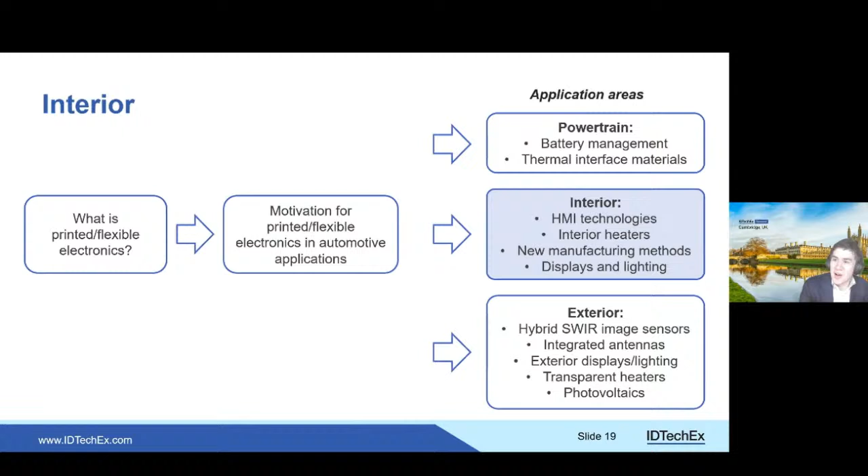You can have light sensors, so organic photodetectors or photodiodes. You can have gas sensors for monitoring interior air quality. Capacitive strain sensors are maybe a little bit less relevant in the car, but you could monitor how much the seat is stretching, for example. And then printed electrodes, which you might want to use for monitoring passenger well-being.

So there's some discussion about how you can track the alertness and the health of your driver, because if they crash, then obviously that's bad for everybody. And so could we be incorporating electrodes into the steering wheel, for example, or pressure sensors into the seat to monitor the heart rate while you're still wearing your jumper? There's a lot of opportunities for sensors within the interior in terms of how it engages with the driver and

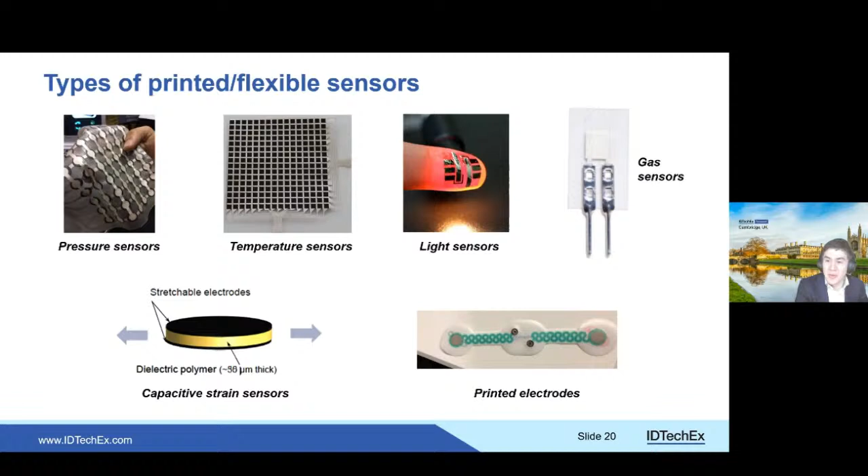And so capacitive sensors, from the point of view of the manufacturer, bring quite a lot of benefits. They're cheaper, there's fewer parts, there's less to go wrong. They can also sense proximity as well as contact, so they might light up before you touch them, for example. In these health-conscious times, you can wipe them clean because there's no grooves around the buttons.

So that's the best of both worlds type approach, where the driver or passenger gets something tangible to turn, but fundamentally there's not really a lot of mechanical parts going on there. It's just a touchscreen that this has been attached to, and then clearly you can change the functionality depending on how you set up the touchscreen.

So I think we're going to see more and more of these integrated capacitive switches everywhere. Whether the passengers or the driver likes them is perhaps beside the point. You're not necessarily going to get them on a Bentley, but it does make it cheaper for the manufacturer, and people will probably get used to them, and you save all of those assembly costs of having to install all of the buttons.

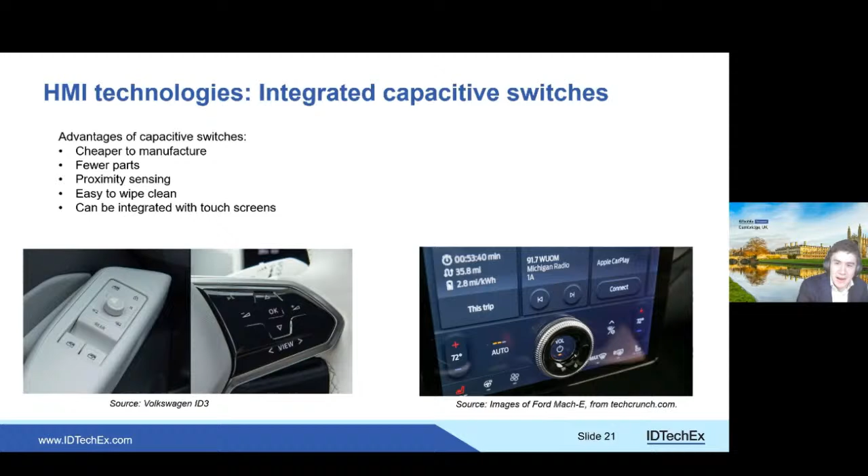There's also likely to be a move towards some integrated pressure sensors. And so if you think about pressure sensors at the moment, you tend to think of just a single point. So capacitive sensors in general can't detect pressure. They'll just detect the presence of a conductive object, your finger, for example. But if we take pressure sensors, there's quite a lot of innovation here, making them using flexible printed electronics, even making them stretchable. And there's some examples where they can be incorporated underneath some leather.

So rather than simply swiping or pinching to zoom, you could control how quickly that pinch to zoom happens by how hard you press something. Or, you could change the volume on the stereo by how hard you press. And that's functionality that at present isn't really there, and will provide another way of differentiating the interiors.

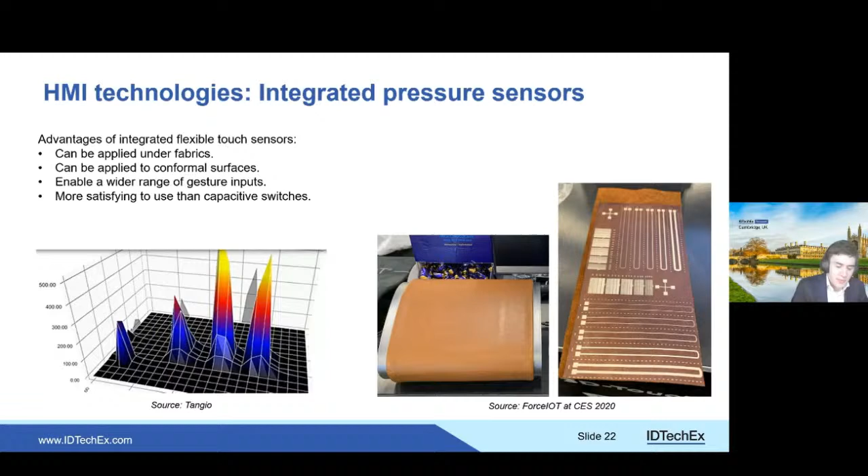And so these include replacing the wing mirrors with cameras, so that's got benefits in terms of air resistance, having displays for the passenger so they can watch TV or something while you're driving, and having a display that replaces the rear view mirror.

I think over time you're going to get more and more displays in the car. They're actually relatively simple for the manufacturer to install because they can just buy those from a third-party supplier, and the display industry is well established. But they do provide a nice way of differentiating your interior.

At present, most of these displays are LCDs because, quite simply, they're cheaper. But I think some manufacturers are interested, particularly in their more premium models, in transitioning towards OLEDs, because customers are used to OLED screens from their phones. They expect that kind of depth of color and contrast ratio. So I think that transition is one we're going to see.

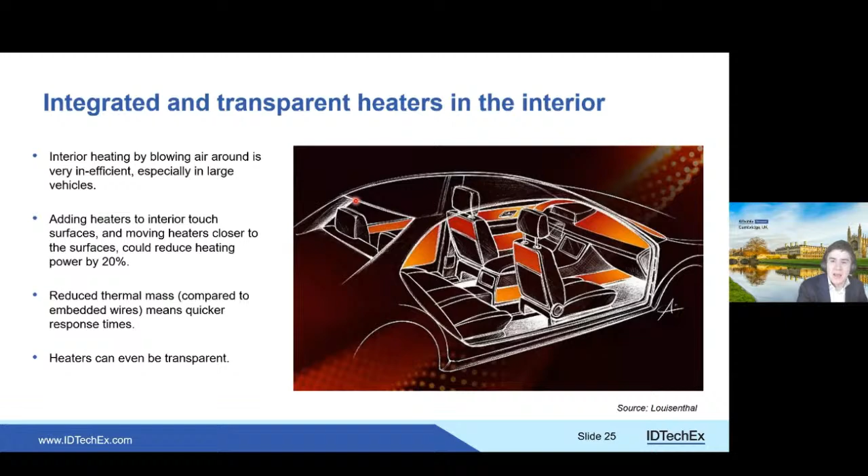The idea here is that you print your conductive films and then conductive ink traces and dielectrics over the top. You could even pick and place surface mount devices if you want. Then you do some thermoforming, tidy it up, and injection mold into the back. And that enables you to create a curved array of capacitive touch sensors.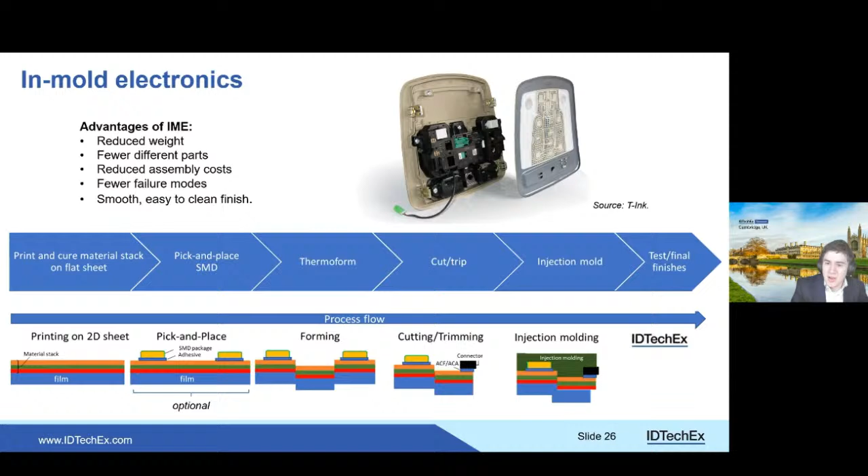If we have a look at a few examples, these are just some prototypes. You can see that you can actually have some quite significant curves in there. As I say, you can put lighting around, and we see a lot of interest in in-mould electronics.

The car manufacturers have got to spend more money than previously on the batteries and the powertrain, because that's a newer technology, so it's still getting cheaper over time, which isn't really the case with engines. So they need to try and save money elsewhere if they want to improve battery performance and still have an acceptable price for the customer.

So one of these ways is to make a relatively futuristic looking interior that's much cheaper to make and is lighter, by transitioning towards in-mould electronics.

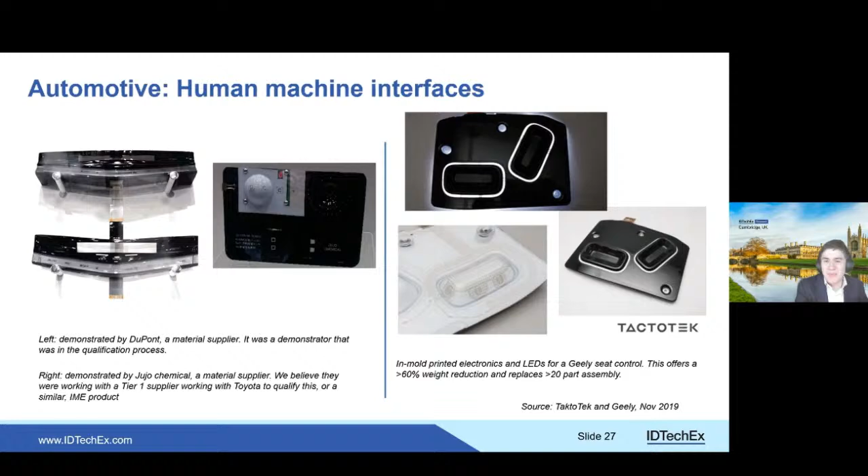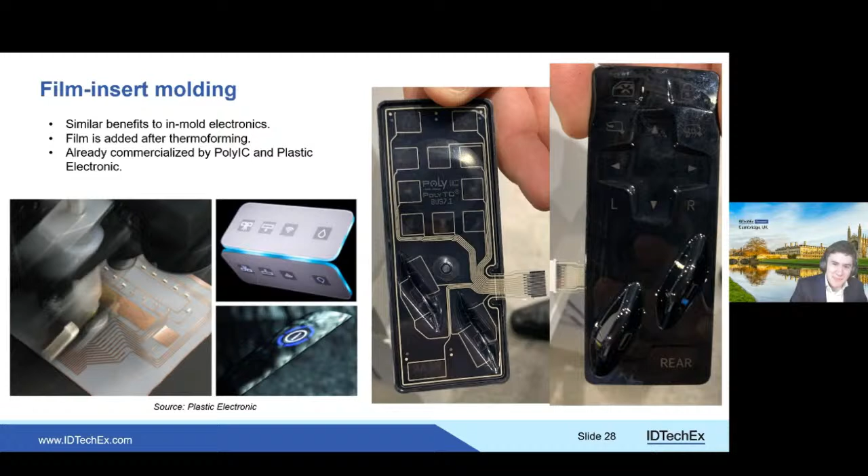There's a very similar approach where you do the steps in a slightly different order. Basically, you do your thermoforming first, and that's called film insert molding, and it offers similar benefits. It's perhaps slightly more process intensive, but this has already been commercialized, and I believe it's being used for some steering wheel controls. You have pretty much the same benefits: you get rid of the buttons, and you can replace them with integrated capacitive touch switches.

There's another manufacturing method associated with printed and flexible electronics that I think maybe doesn't get enough attention as it deserves, and that's trying to replace wiring.

In a conventional car, you have a sort of wiring harness made by an external supplier. They'll have mapped it all out on a board and done all the cable ties, then hand the manufacturer this fairly heavy set of wiring. That's done basically still as a manual process, and thus is prone to some errors. It's also quite heavy because you've got to have all of that insulation for all of the wiring.

So the suggestion is that you can replace that by printing the wires onto injection molded parts. Obviously, if you used 3D printing to make the plastic parts from the ground up, that would be a very slow process. So for these larger items, you can take a part that's been made by injection molding, print your wiring onto it, print some dielectric material over the top, and then your wiring becomes integrated into the actual material itself rather than just a separate wiring harness.

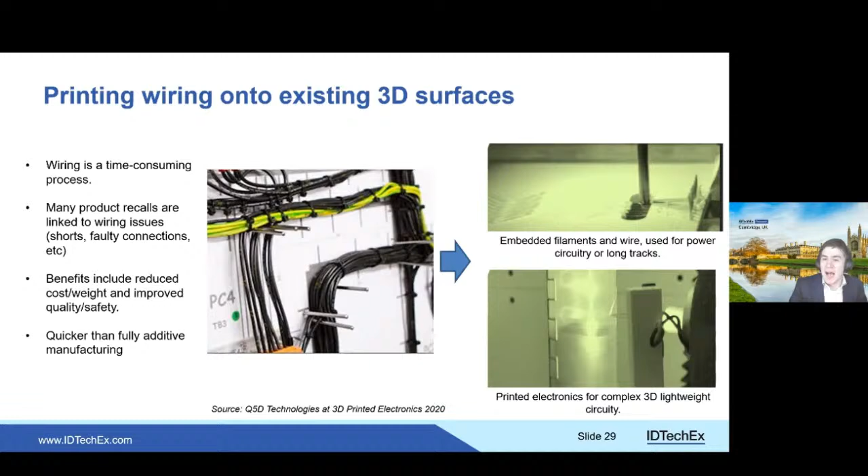The other manufacturing approach I'd like to mention is this idea of hybrid electronics, where you try to take the best of both conventional electronics and fully printed electronics. This is a best-of-both type approach, where you take the conformable, printable, lightweight aspect of conventional printed and flexible circuits, combined with the processing capability of mounted integrated circuits.

This enables you to reduce the weight and improve the conformality of your circuit boards anywhere in the vehicle. You no longer have to worry about fitting a rigid circuit board in somewhere that's relatively heavy because the weight adds up. Instead, you can have something flexible and lightweight, but still capable of significant processing, because you've mounted a packaged IC, or even a flexible IC in some cases, onto the circuit.

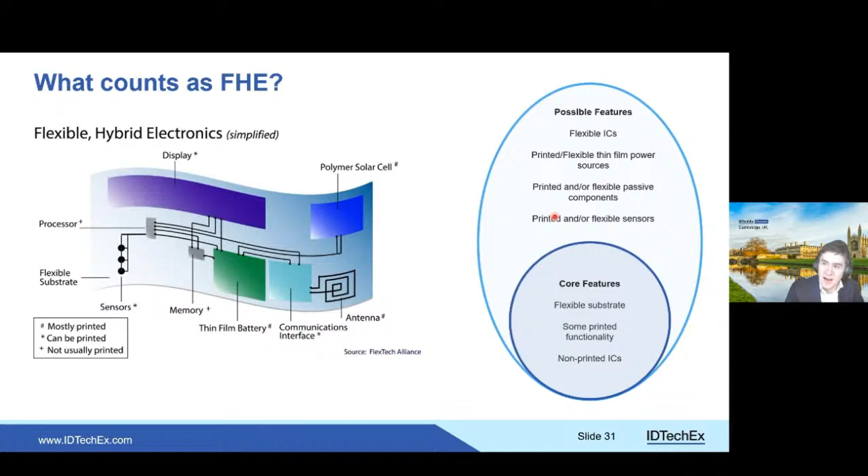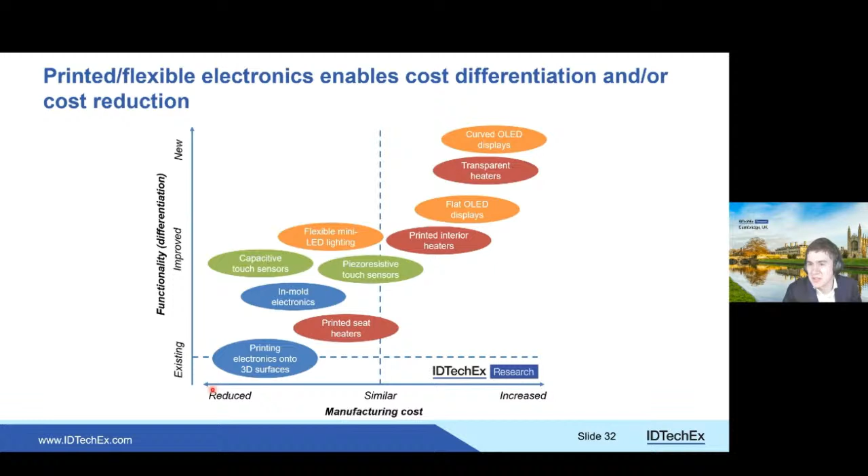Moving on to the exterior, which is my last section. One of the opportunities here for printed electronics is with sensors, as we move towards autonomy - or maybe not full autonomy, but advanced driver assistance systems, ADAS. It's important that the car can sense as much as possible, and because the vision isn't being used by a human, we don't have to constrain ourselves to the visible spectrum. There's quite a lot of potential, I think, for shortwave infrared imaging.

But if you use a shortwave infrared camera, then it's much easier. And that's the case because at longer wavelength, light scatters a lot less. As you go to longer wavelengths, you're going to get fewer reflections off the water molecules or dust particles. And thus, it's much easier to obtain a high quality image that you could then either convert into a regular image to help the driver, or more likely process using machine learning, some kind of image processing algorithm to inform your autonomous driving system.

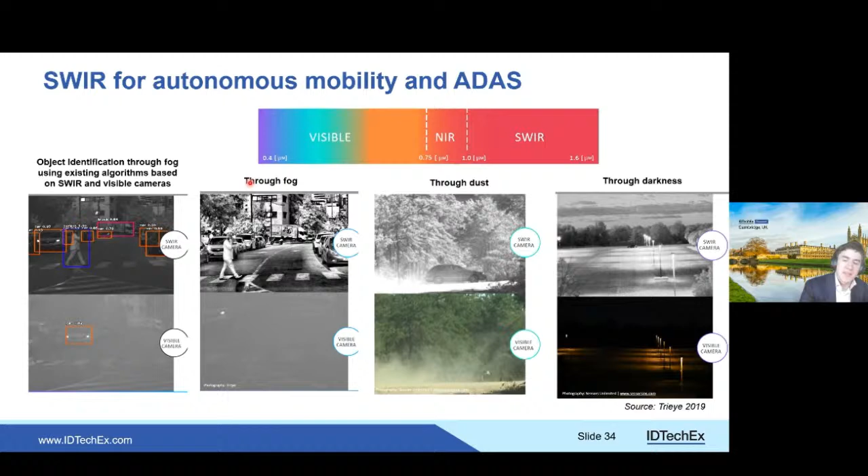And so what's this got to do with printed electronics, you might ask? Well, it comes in the form of these hybrid sensors. So as you might know, silicon sensors can't detect any light above about 1,000 nanometers, and even above 900, they're not very good. And so if you can extend the wavelength sensitivity of your silicon by printing a layer of either an organic semiconductor or quantum dots on top, then you can use the back end, the readout integrated circuit that's silicon, but it detects up to say 1,500 or 2,000 nanometers.

And so whilst not flexible, this top layer is processed from solution. So you can do that with quantum dots or organic semiconductors, as I say. So it is already possible to image in the shortwave infrared range, so between 1,000 and 2,000 nanometers, but it's very, very expensive. That's reserved for scientific instruments because one of those sensors might cost you $10,000 or $20,000, which is obviously completely absurd for a car.

And so being able to make them on a silicon backplane just by printing a layer over the top, you could reduce these down to the hundreds or even tens of dollars, and then it becomes a much more compelling proposition, to supplement the other sensors that we hear so much about, such as LiDAR. I think that this idea of sensor fusion, of using multiple different sensor methodologies so that you have some redundancy, is something that you hear more and more about, and I think that shortwave infrared imaging is likely to be part of that.

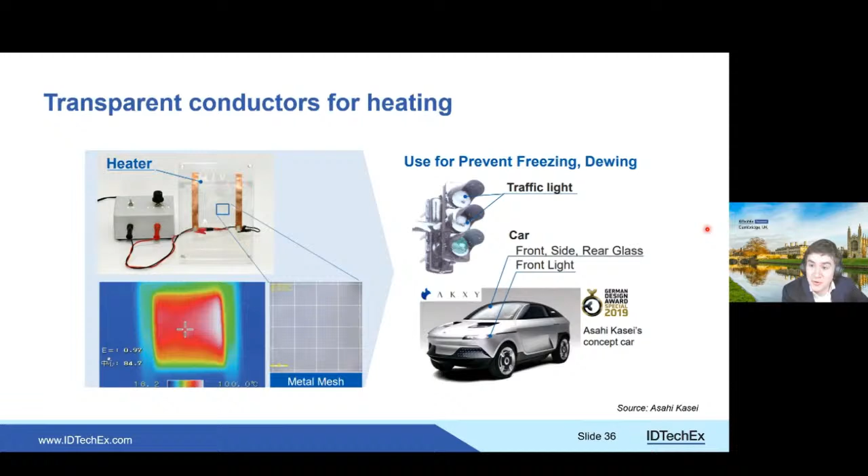And so simpler versions of this have already been adopted. And so this is again done mainly via In-Mould Electronics, in which a thermoformed piece of plastic has some wiring embedded in it. And then clearly you can heat up that wiring to get the frost or mist off your lights.

And it's important to recognize that this is more important for electric vehicles because, unlike an internal combustion engine vehicle, electric motors and the power systems aren't pumping out anywhere near as much waste heat. So it's not a case of just turning your car on in the morning for 5 minutes before you get in and everything will warm up and defrost, because it's not going to be generating that much heat, and you don't want any energy to be wasted if that's going to reduce your range. And so being able to target the heating just at the lights, in this case, I think is quite compelling.

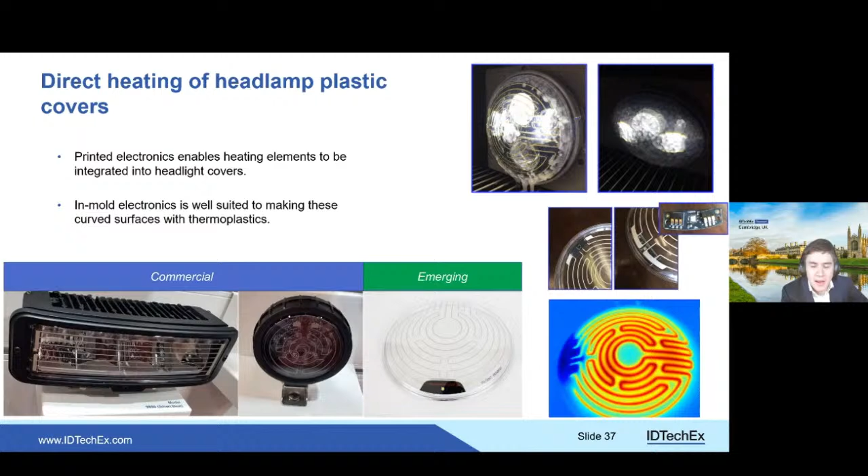And Mercedes are doing something similar, and BMW once did a while ago, but I don't think they're continuing with it. So that's certainly an opportunity there. And again, it's a great example of printed flexible electronics being used to add value to the customer rather than make something cheaper.

And again, you'll be able to get something that's flexible, conformal. You can have different patterns. You can address each of these LEDs individually. So if you want to send a message to another driver, if they've annoyed you, you can presumably tell these LEDs to spell out some words or something. And perhaps more usefully, you can have it on the front of the car for communicating with pedestrians.

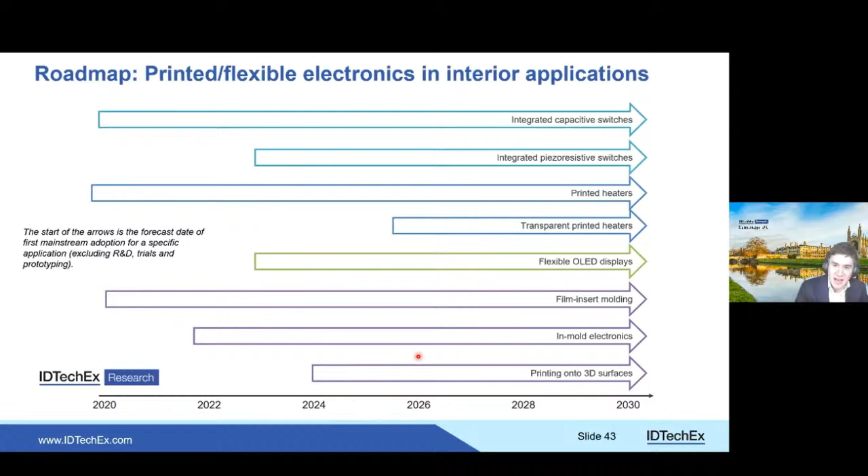And we'll also see something I haven't really spoken much about, which is the incorporation of antennas via printing. Cars are going to need more and more antennas, and so you're going to get those printed, we believe, onto plastic panels in the car, and perhaps also onto the windows as well, because clearly the metal bodywork can't be used for printing antennas onto.